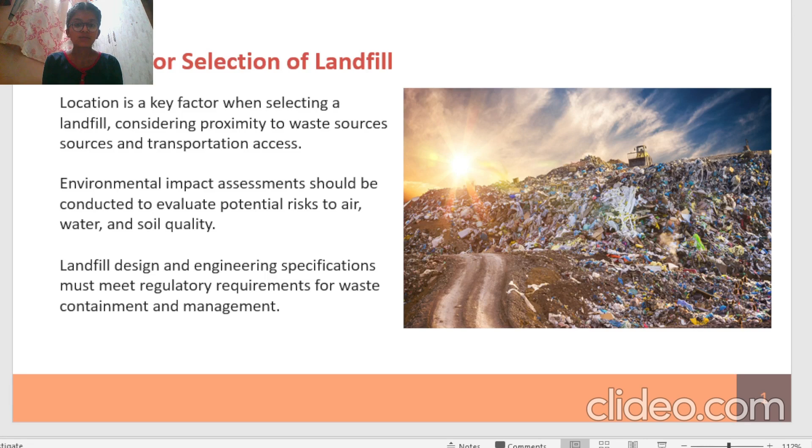Next, we have regulatory compliance. Ensure the chosen landfill complies with local, state, and federal regulations governing waste disposal. Verify the landfill has obtained all necessary permits and licenses for operation, and confirm the facility follows proper procedures for waste handling, monitoring, and reporting.

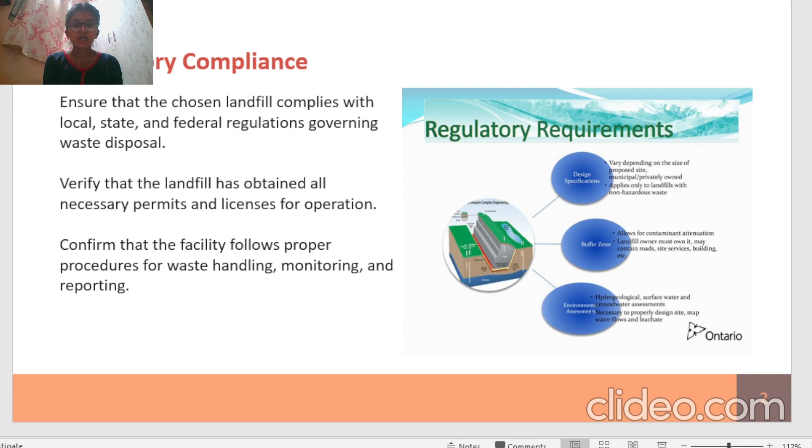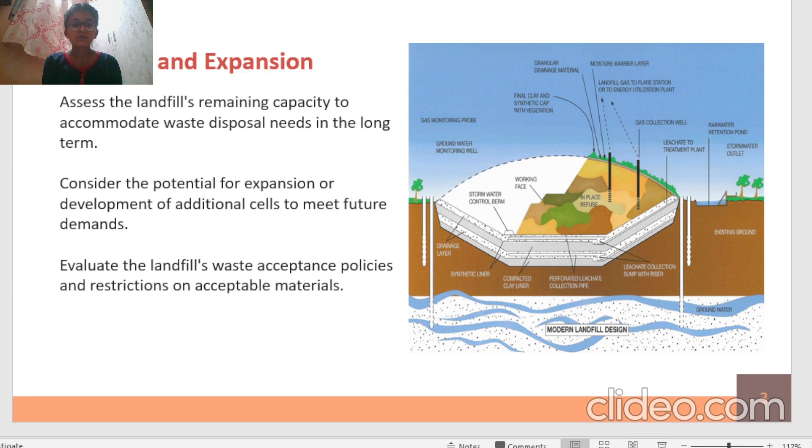Next, we have capacity and expansion: assessing the landfill's remaining capacity to accommodate waste disposal needs long term, considering potential for expansion or development of additional cells to meet future demands, and evaluating the landfill's waste acceptance policies and restrictions on acceptable materials.

Next, we have environmental considerations: evaluating the potential impact of the landfill on surrounding ecosystems, wildlife, and habitats. We also consider factors such as groundwater contamination, methane emissions, and odor control, and implement measures to mitigate environmental risks such as liners, leachate collection systems and gas capture.

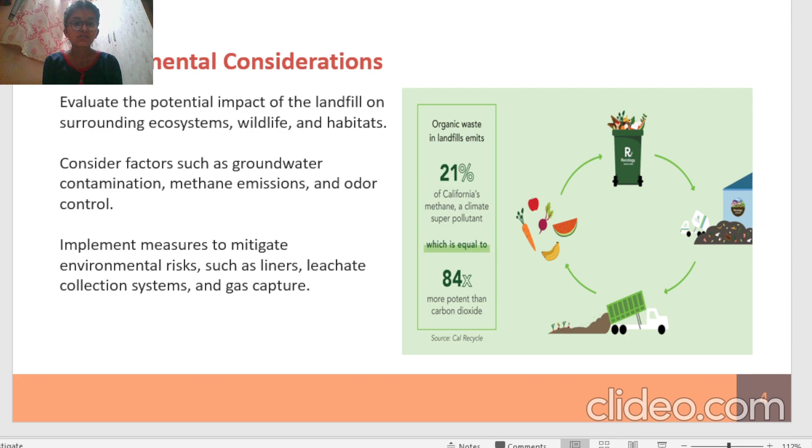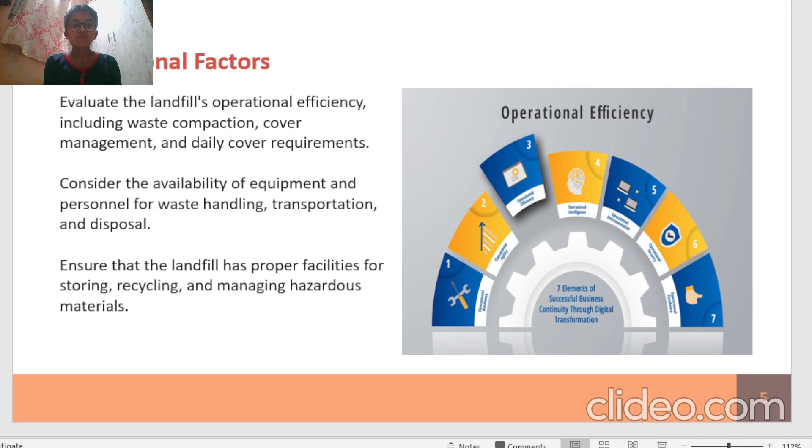Next, we have operational factors: evaluating the landfill's operational efficiency, including waste compaction, cover management, and daily cover requirements; considering the availability of equipment and personnel for waste handling, transportation, and disposal; and ensuring proper facilities for storing, recycling, and managing hazardous materials.

Next, we have community engagement: engaging with local communities and stakeholders to address concerns and gather feedback, developing communication strategies to inform residents about landfill operations, safety measures, and environmental monitoring, and collaborating with community organizations and government agencies to build trust and transparency.

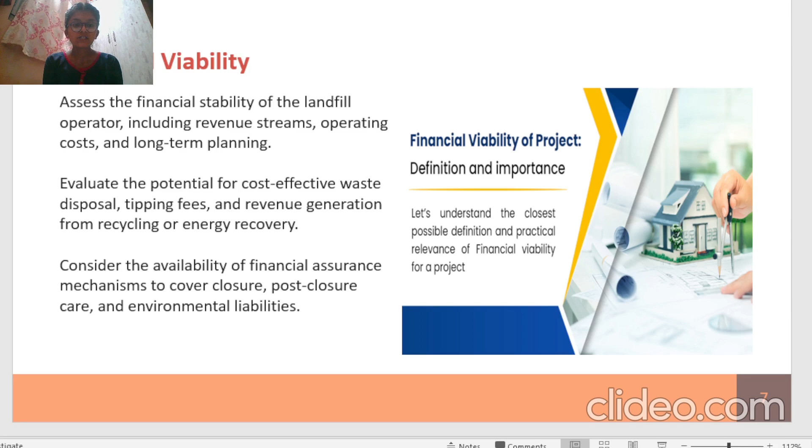Next, we have financial viability: assessing the financial stability of the landfill operator, including revenue streams, operating costs, and long-term planning. Evaluating the potential for cost-effective waste disposal, tipping fees, and revenue generation from recycling or energy recovery. Considering the availability of financial assurance mechanisms to cover closure, post-closure care, and environmental liabilities.

Next, we have risk management. When selecting a landfill we should also look at the negative factors. We need to manage waste well, which prevents degradation of the environment. This involves identifying potential risks associated with landfill operations such as fire hazards, leachate leaks, and slope stability; developing contingency plans and emergency response protocols for accidents, spills, and natural disasters; and implementing monitoring systems and regular inspections to detect and prevent environmental hazards.

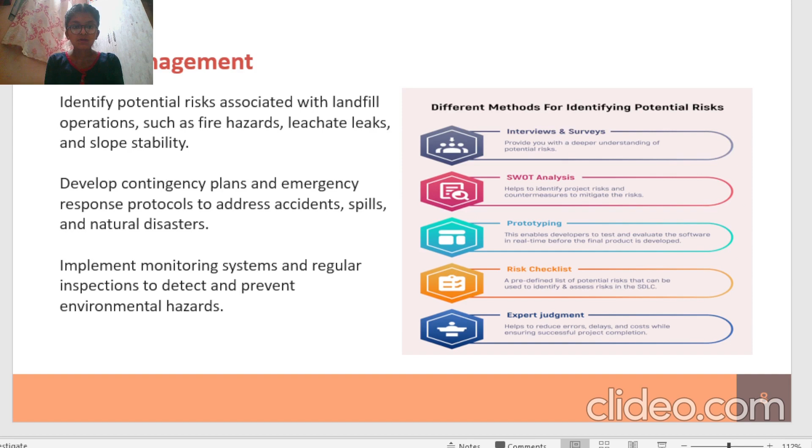Next, we have public health and safety: prioritizing public health and safety by implementing measures to control disease vectors, pests, and contamination; ensuring compliance with occupational health and safety regulations to protect workers from hazards and accidents; and monitoring air quality, water pollution, and noise levels to safeguard the health of nearby residents and workers.

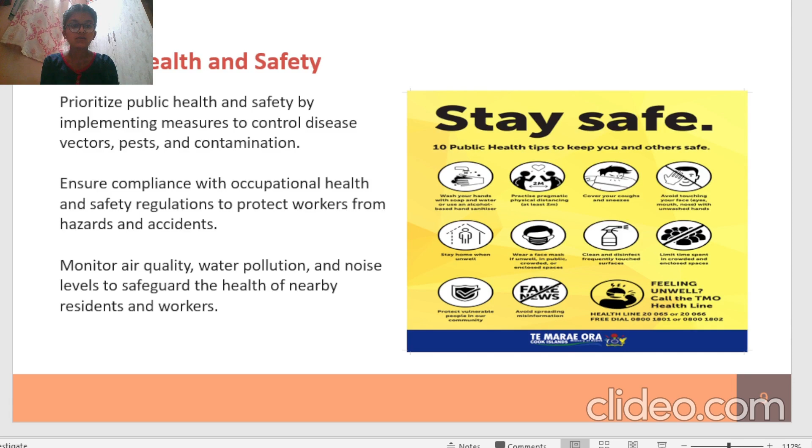The next topic is urban flood controls. Let's begin with a little introduction. Urban flood controls are the systems and strategies implemented in urban areas to manage and mitigate the risk of flooding. These controls are essential to protect infrastructure, properties, and lives from the devastating impacts of flooding. They aim to reduce the volume and velocity of stormwater runoff to prevent inundation of urban areas.

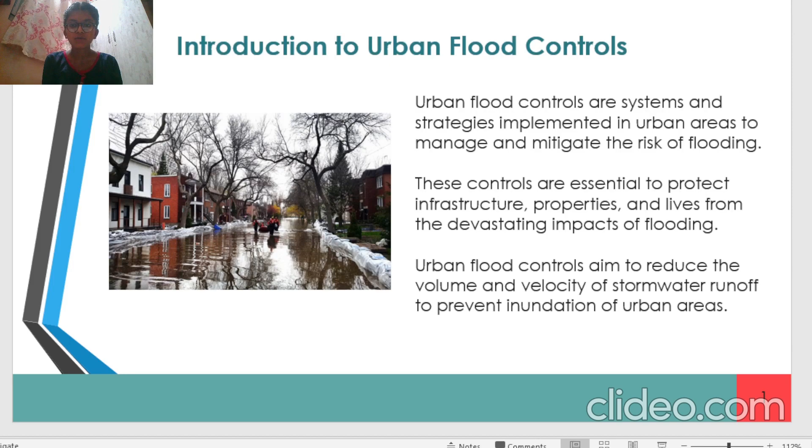Next, we have types of urban flood controls. Green infrastructure such as rain gardens and permeable pavements helps absorb and filter stormwater to reduce runoff. Stormwater management ponds and detention basins store excess water during heavy rainfall events, releasing it slowly to prevent flooding. Flood walls and levees are physical barriers built along water bodies to contain flood waters and protect urban areas from inundation.

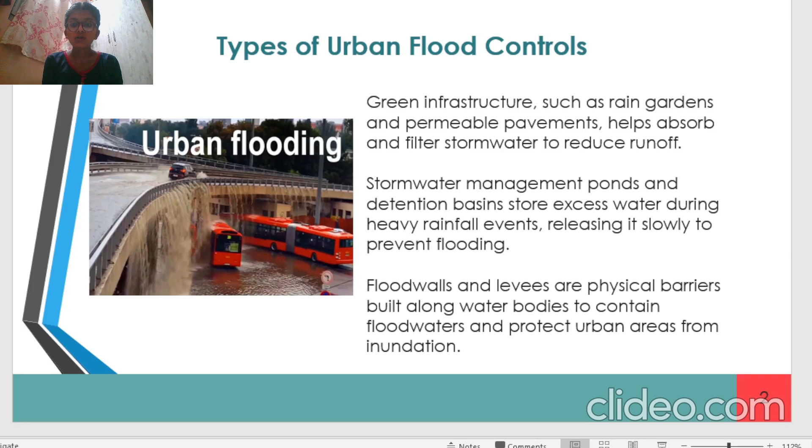So there are many types of urban flood controls: green infrastructure like rain gardens and permeable pavements which absorb and filter stormwater; stormwater management ponds and detention basins that store excess water during heavy rainfall and release it slowly; and physical barriers built along water bodies to contain flood waters and protect urban areas from inundation. Next, we have the importance of urban flood controls.

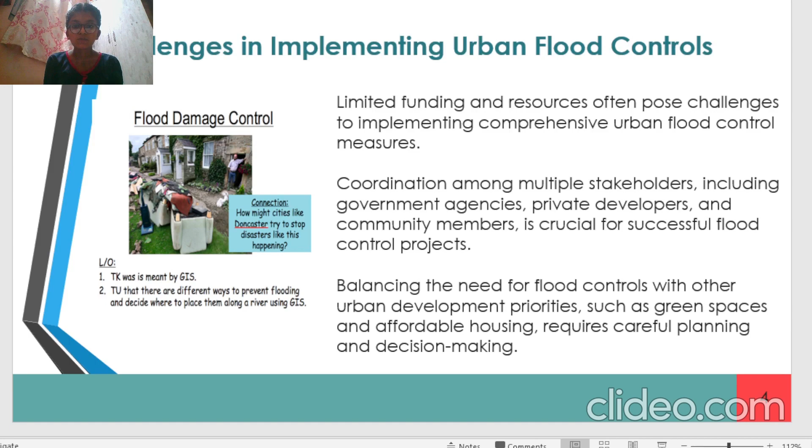Next, we have the challenges in implementing urban flood controls. First, limited funding and resources often pose challenges to implementing comprehensive measures. Second, coordination among multiple stakeholders including government agencies, private developers, and community members is crucial for successful flood control projects. Balancing the need for flood controls with other urban development priorities such as green spaces and affordable housing requires careful planning and decision making.